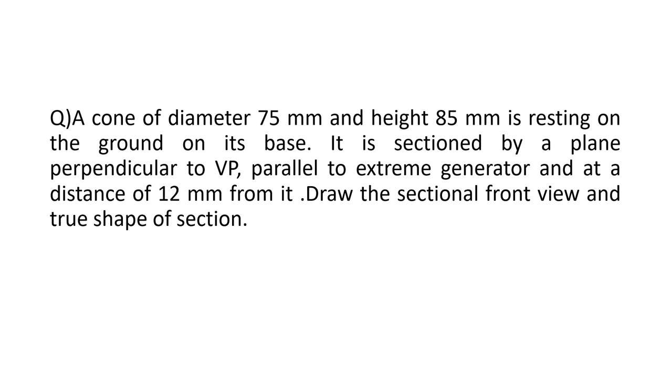Now, first you draw a reference line like this. Since it's a cone, top view will be a circle. Draw a circle of radius 37.5 mm, then divide that into 8 divisions like this at 45 degrees. This line should be always parallel to this line and this diameter should be perpendicular to this reference line. Now name those points as A, B, C, D, E, F, G, H.

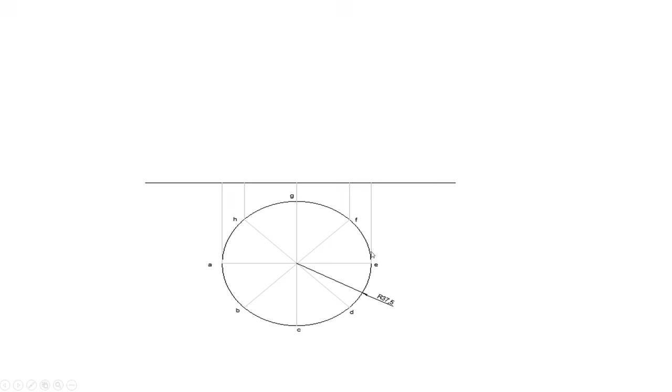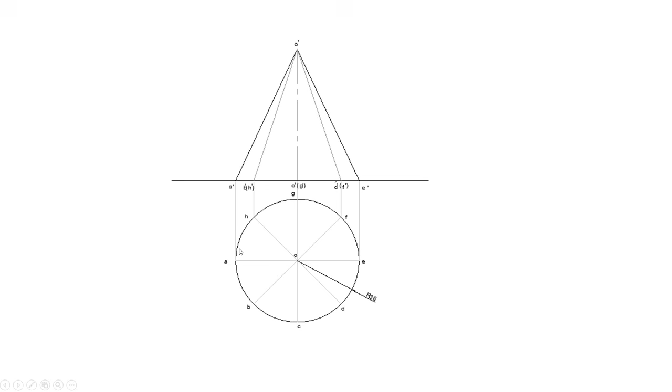Now project all those points to the reference line like this. Since height of the object is given 85 mm, from here you mark height of the object 85 mm, name that point as O dash. Draw all these lines, generators. Now in this front view, the outermost triangle should be dark and all other lines should be thin lines. Here in the circle, all these 45 degrees lines should be thin, only this outermost circle should be dark.

Now it is given that the section plane is parallel to the extreme generator. So this is the extreme generator, O dash E dash. So parallel to that you want to draw a section plane at a distance of 12 mm from it. So at perpendicular distance of 12 mm you draw section plane parallel to this line. Use a chain line like this to draw the section plane at a distance of 12 mm from here.

Now name those points. This section plane meets these lines at some points here. So this is 1 dash, 2 dash, 3 dash here, and 4 dash and 5 dash is on the base line, then 6 dash is here and again 7 dash. 5 dash, 6 dash and 7 dash are points coming on the other side of the cone, so those points will be invisible.

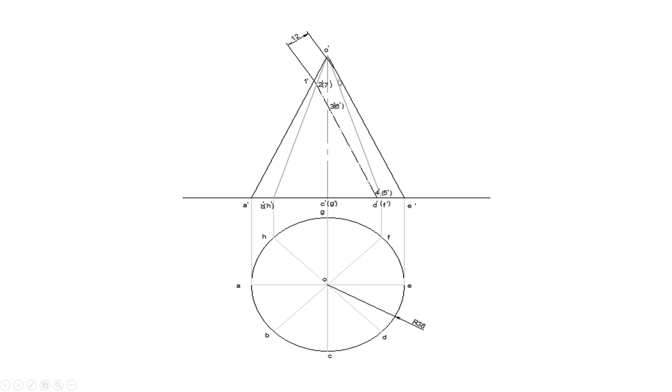Now you want to draw vertical lines from all these points to the corresponding lines in top view. 1 dash is on the line OA, so draw vertical lines from 1 dash to OA like this. From 2 dash and 7 dash, you draw vertical lines to OB and OH. Now for 3 dash and 6 dash, you cannot draw a vertical line because it's a straight line like this. So to get 3 dash and 6 dash, you draw a horizontal line like this to the extreme generator. From here you draw a line like this to this point and draw that line up to this line.

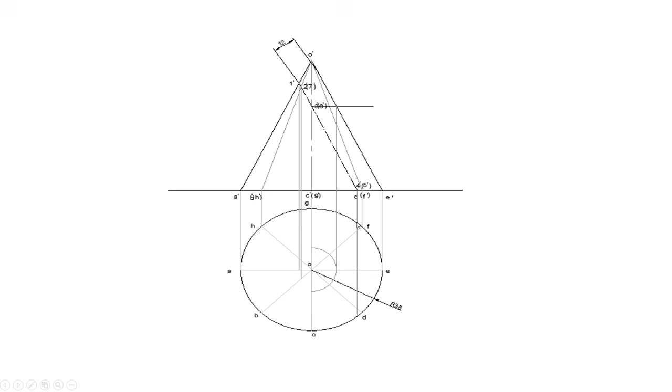From that, taking this point as radius, you draw 2 arcs here and here, or you mark this distance upwards and downwards. So this is 3 and this is 6. Now other points will be 4 and 5. 4 dash and 5 dash are meeting this baseline, so you draw vertical lines from 4 dash and 5 dash to the base circle, like this, up to this base circle. So this point and another point here. Name those points as 1, 2, 3, 4, 5, 6 and 7.

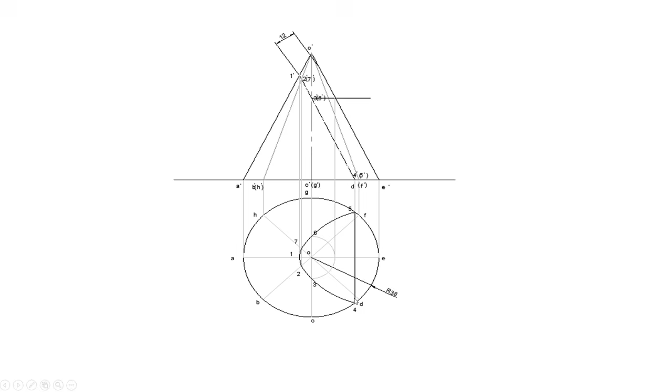Now use a smooth freehand curve to connect them like this. 1, 2, 3, 4 and a straight line from 4 to 5, and 5, 6, 7, 1 is another curve. So here it's a smooth curve and a straight line. Now you want to hatch that, all the space inside this curve. So at 45 degrees like this, hatch that space between this line and this curve completely.

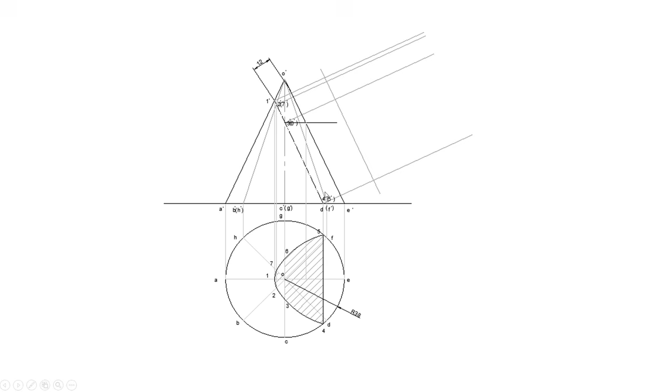Now to get the true shape, you have points 1, 2, 3, 5, 6, 7. From all those points you draw lines perpendicular to this section plane like this. From 1, 2, 3 and 4 you draw perpendicular lines like this. Now draw a line parallel to this section plane, keeping some distance from here.

Now the distance from axis to 1, you mark from here to 1 like this. Distance from here to 2 you mark on the second line. Distance from here to 7 you mark on the same line. Distance from axis to 3 you mark from here to 3, and distance from axis to 6 you mark on the same line. Distance to 4 and distance to 5, you mark from here to here. You will get some 6-7 points.

You connect them by using a smooth curve like this, and here it is a straight line. So you got that curve. Now at an angle of 45 degrees to this line, you hatch it. This line should be thin line. So this is the sectional view of the cone, and this is the true shape of section. Hope you understood how to draw this.